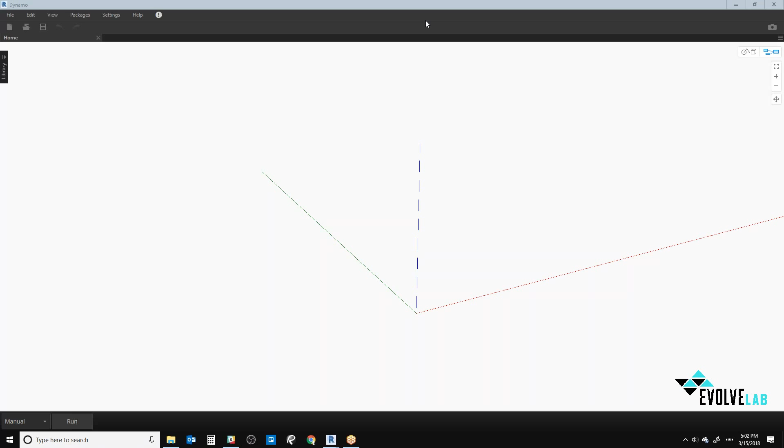So to start off, the idea I'm going with—if you guys saw the agenda for the day—is related to renumbering with a spline and then using this custom package called Firefly. That's kind of the holistic view of what we're doing and why we're doing it. Is there any questions about that, or anything you guys want to comment on?

Sounds good. Good. Cool. All right. So

So to start off with, I'll just draw this spline so that we can start to get an idea of what this is going to entail. Can you guys see my Revit? Yep, cool. So I have all of these parking stalls across here, and I just set all of their mark values to 0 just so that we could renumber them by spline.

So we're just going to say we want all of these things to be numbered. Like this will be 0, and then you'll come all the way across, and this will be number 12 on this end, and then say this will be number 13, and then we'll come across and this will be 21 or something, whatever it's supposed to be.

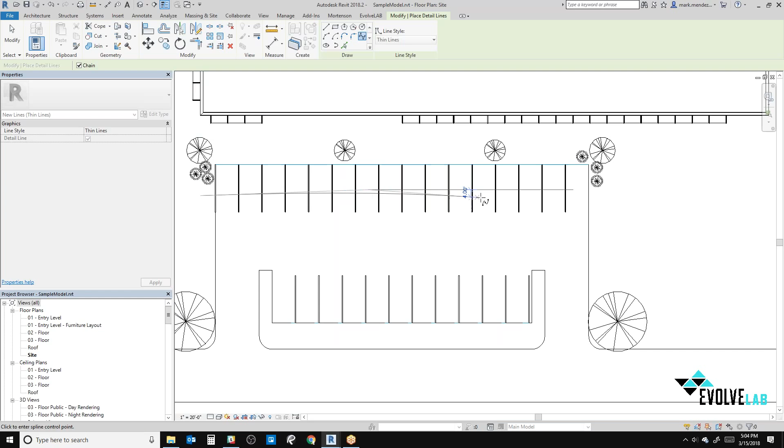So if we want to do something like that - renumbering with spline workflows is pretty common, especially when it comes to using things like sheets and views on sheets. You can renumber those really easily.

You could do things with parking really easily and rooms really easily. Like if you have some sort of correlation between, say, your room and where your room is in the project, and then what the number of the room's going to be, then you can do that pretty easily.

So I hid this roof, so you can imagine, if say there's some room up here in the top right, and if you want that to be, I think this is going to be the second level or something. So if it's like 200 here, then you want it to go in sequential order all the way through here, and this will be like 210 or something like that.

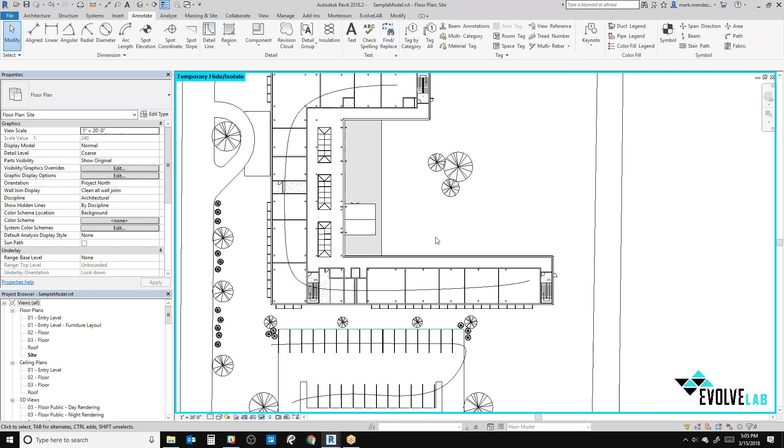And instead of manually doing it, the idea is that you'll be able to just take a spline and do something like this, and then you can analyze that spline using Dynamo and then renumber all of your rooms based on that spline. So you would do something like that, and then you can just run your script and it'll renumber all of your rooms. So I'm just going to do it with parking though, because I was recently working with parking.

And one of our clients had one of these scripts. I didn't see the script, but I thought the idea was cool, and that presenting about it would give a good entry point into introducing how to start working with geometry and Dynamo.

So to start off with, we're going to try to think about where on this spline these parking stalls are located. So this one's very close to the beginning, and this one's very close to the end. And so the idea is, well, how do you measure what's at the end and what's at the beginning?

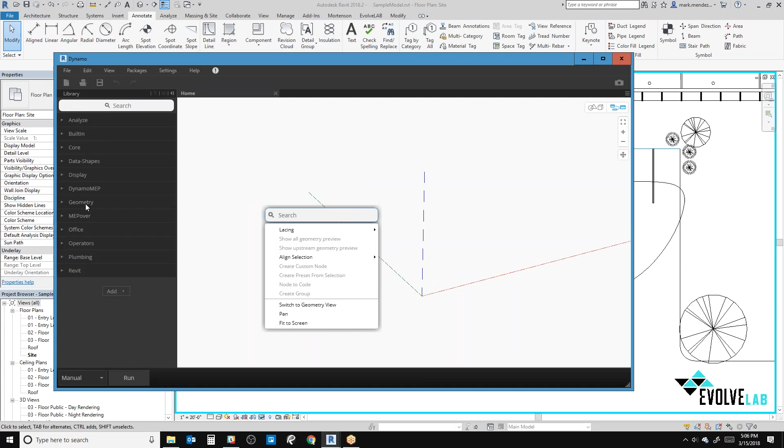And so kind of the idea of this is to use - it's called parametricism, but it's in a different vein than typical parametricism that we see. So if we come into geometry and we start to look at our curve, I'll make a line first just to get it started.

So I could just grab some points and plug these things in and say just make a line that looks just like this, nice and straight across. And so what it's called is parameterizing a curve, something like that.

So if you take the curve, you see right away within curve, and you'll see the same thing within surfaces and within a lot of different primitive geometry shapes, that you have these things called parameters. So it's like normal at parameter or horizontal frame at parameter.

And so if you say something like point at parameter, then if you pass your line into here, what this point at parameter node does is it makes the line into its own coordinate system. So the beginning of the line will be 0, and the end of the line will be 1.

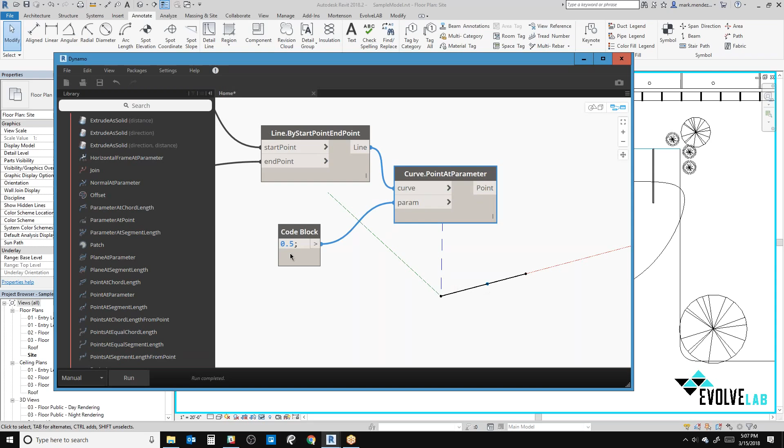So if you go ahead and do something like 0.5, then you can see a little point was populated right there halfway through the line, at 0.5. So you see 0.2, and you change it, then it comes here.

So what I want to show here is - and this is a good leeway into describing this process visually - you can use this package called Firefly.

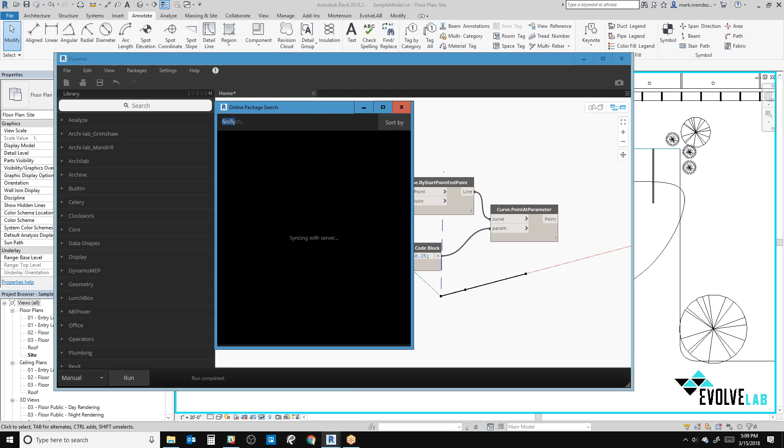As I can. You change your path to your packages frequently, is that what I'm hearing you say? Yeah, I pretty much do it very explicitly so that I can try to get only the custom packages I need, but more often than not, I just try to make it so that I don't have to worry about my custom packages at all.

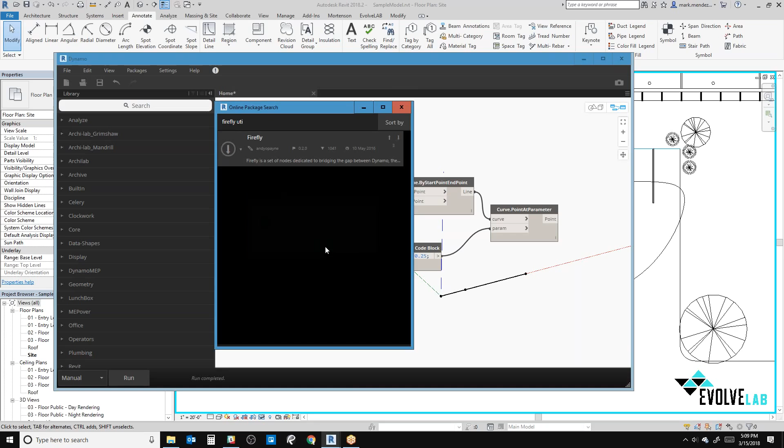Oh wow, okay, I'm not sure where Firefly went. What is going on here? Try hitting backspace once. Oh, here it is. Yeah, so this will go pretty quick. There you go, all right cool. So I got Firefly now.

So Firefly is a custom package. It's typically used with Arduino. It was originally a Grasshopper special package or something like that. The Firefly team has this whole Grasshopper to Arduino framework and infrastructure setup, and they went ahead and ported some of their stuff over to Dynamo.

I don't use the Arduino stuff very much, I did a lot of Arduino stuff in college. Essentially what we can see here is when we drop this node on the canvas, we're going to get the periodic option. It's pretty cool - if you look at the Dynamo code base, you can see that you can tag certain nodes and say periodic enabled essentially. So whenever you drop a certain node on the canvas that allows for periodic, it'll enable itself and realize there's a periodic node you can use.

So I'll just say go from 0 to 1, and this thing kind of works this way. If you have something like this, it's going to continuously run across, and you'll put in your numbers like this. So to kind of unpack this a bit, let me back up one step to make sure everybody's on the same page.

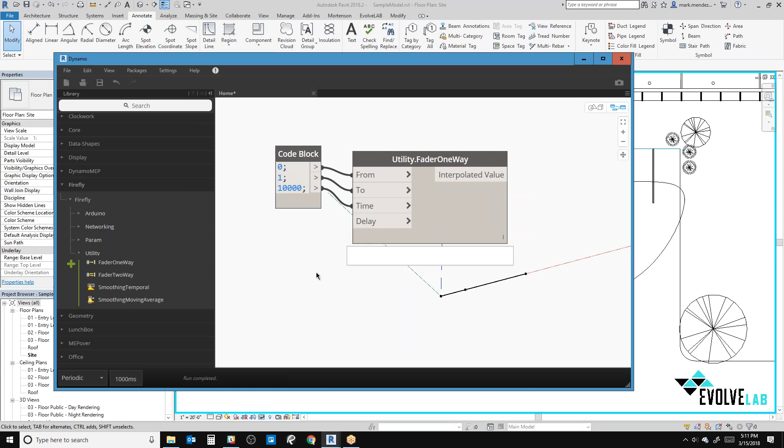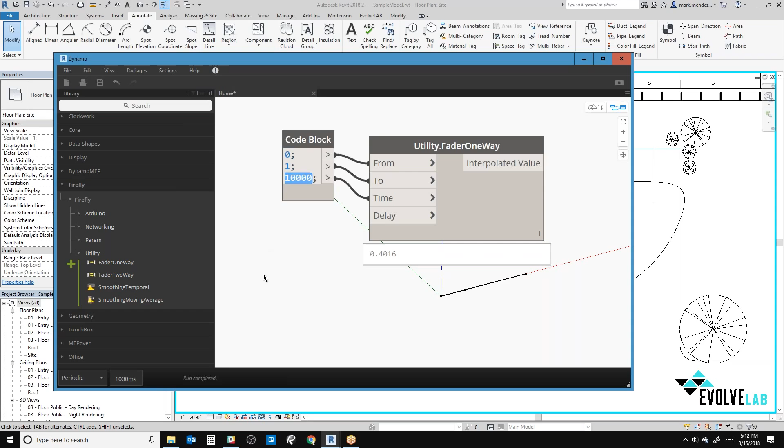Right now what I'm doing is I'm trying to run an animation that'll show how the parametricism of a curve works, so you can start to see what it means to define the start of a curve and the end of a curve, and how to access the points along the curve. You can see this number is climbing by 0.1, and that 0.1 just comes from this - it's telling Dynamo to rerun this event every second, or 1000 milliseconds, and then this one's telling it to chop it up 10 times. So it's going to be skipping on 0.1, and you can take that number and plug it in over here instead.

Well, yeah, let me just cancel that real quick.

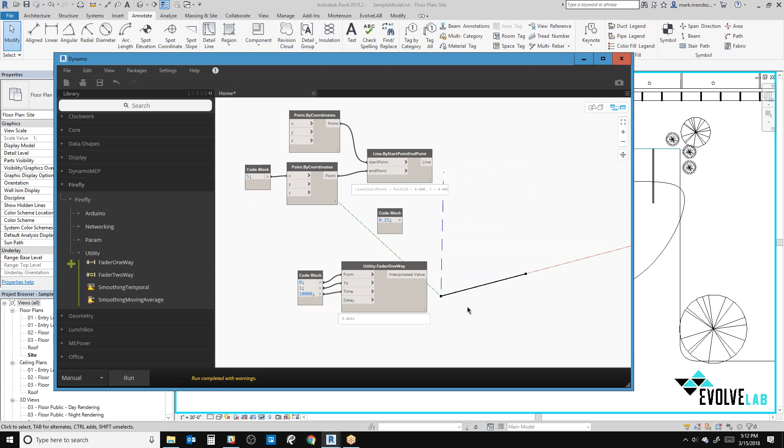I think my point at parameter... node's just a second. Well, what a bummer. Okay, I'll come back to Firefly in a second.

I might have to drop it on the canvas first, actually. So I could show it with like a helix really quick, just to demonstrate something.

If we go ahead and use curve point at parameter, we're pulling all of the points here. If we watch down in the geometry preview, we can see this node, this point, climbing up this helix. We can make it into a sphere to show it a bit better.

And make it like a pretty small radius.

So in one way, this is how you could start getting into doing animations and different things in Dynamo. You can start animating rotations, folding things, and stuff like that. You can also start animating things like creating perspective views. You can draw a spline and then run along that path while making perspective views and taking screenshots, so you can start making GIFs of walking through certain parts of your building really easily.

Some clients like it, so I figured maybe if I showed this to you guys, you could carry it away somewhere or do something with it. Does anyone have any questions about this?

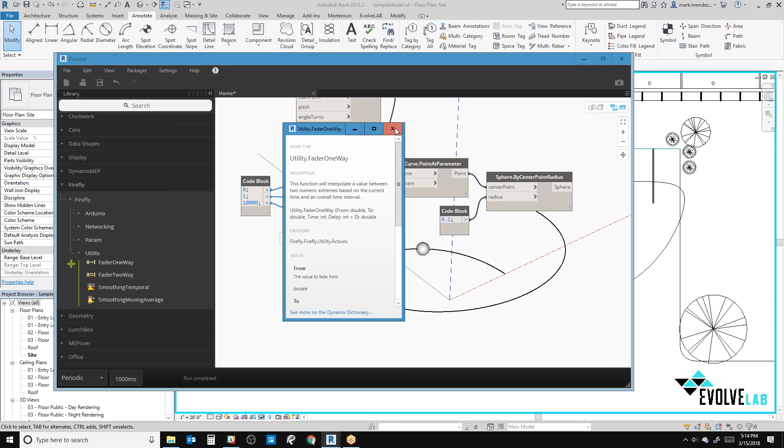Why is that called fader? I'm trying to figure out - I mean it's not important, but I'm just wondering what that name means. I think it's just like fading from, fading to. Yeah, okay, it's not important, but good question, I like it. It's fine.

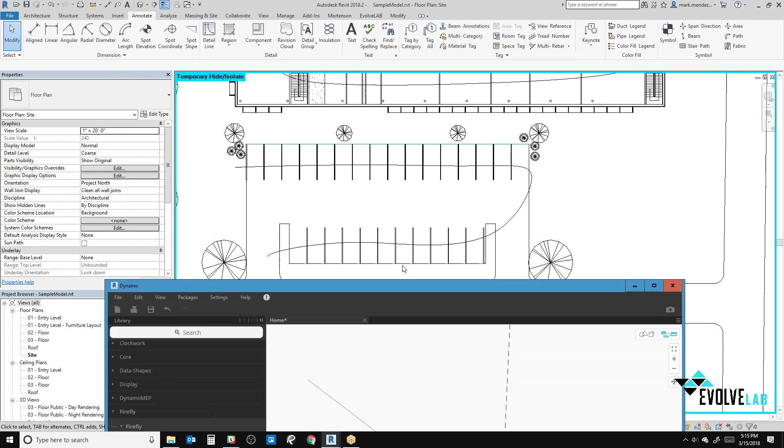So coming back to our original idea of trying to renumber all of these parking stalls with this spline, first off we'll just grab the spline.

We could just use this Select Model Element node. We'll click on the spline, and we can see it come in here - there's our detail curve.

What we want from it is, essentially, we'll also grab all of the parking stalls. Here in Revit selection, we can do All Elements of Category, which I imagine most people are familiar with, and grab all of the parking.

From that, we get all of these parking stalls. We can click on this element ID and it will zoom into one of these parking stalls, confirming that's what it's doing.

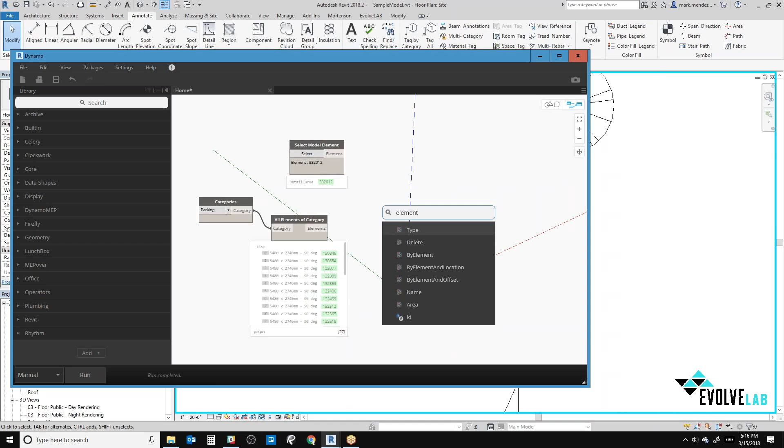Then past that, we can get the curve from the detail curve. The detail curve is just an element in and of itself that has information related to things like line styles, and whether it's symbolic or a model line or a detail line - you can start to get into that when you're using stuff coming out of families.

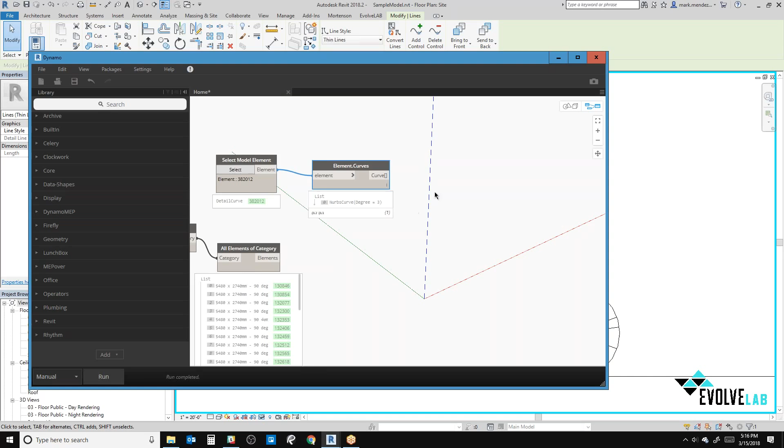Once we do our curves, we can see our parking curve came in right here. We could do something like pulling element geometry from all the parking elements - this might run for a second - but then we can see that this is indeed that spline chopping through all of these parking stalls.

So if we want to get where these parking stalls are along this spline, first we'll want to get the location of all the parking stalls. This Get Location node is pretty good.

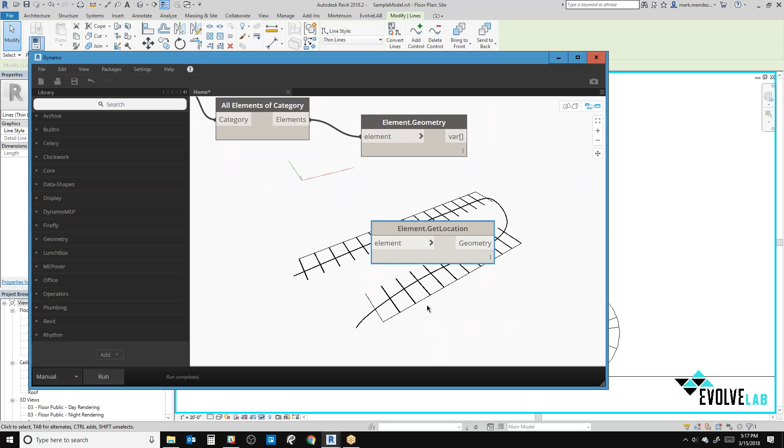It tends to have a weird interaction with structural stuff. If you're working with structural framing or columns, sometimes you have to get those lines in different ways, like going with element geometry or element curves for a structural frame or beam. You won't necessarily always get back a location from that kind of stuff, but maybe that's helpful for anyone working on that.

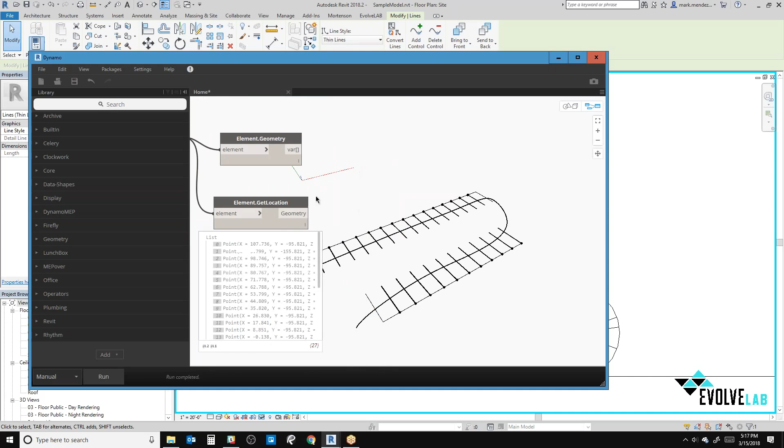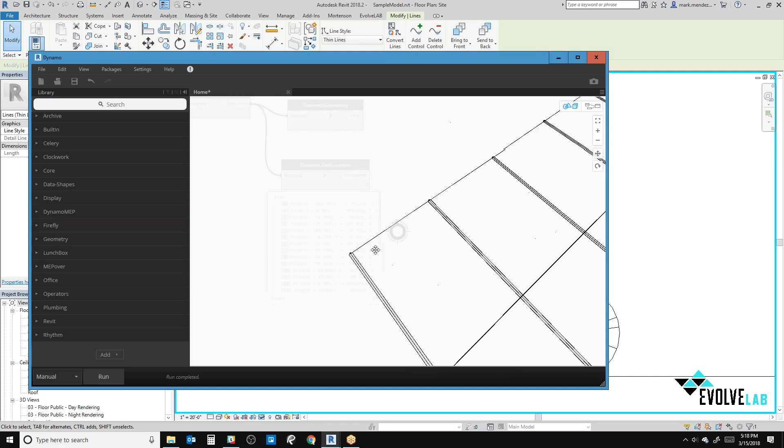So I'll go ahead and hide the parking stalls, and we can see the location of all those parking stalls as they're laid out. It looks like the Get Location node gives us back the point of wherever the placement point of the family instance is - wherever it was built. It looks like we get maybe the bottom right corner of every one of the stalls.

So if we want to get its location relative to the spline, we have another nice node called Closest Point To. We can pass in our curve, and then pass in our points. If we run this, we'll only get back one point.

So we have to make sure we do lacing longest, and I'm not sure I necessarily want to dig into lacing too much. I bet Paul did a really good job explaining it at his BIM workshop at AU this past year.

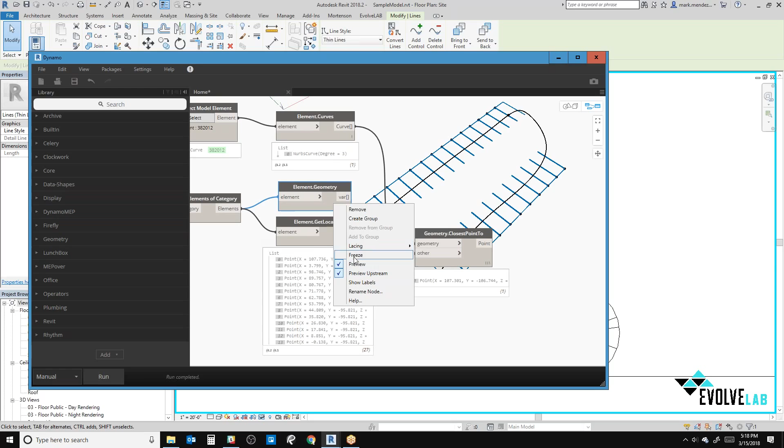So is that true, Paul? Did you go over lacing? I did go over lacing. Not everybody here was there, but yeah, we went over that. I think everybody in the room probably has some concept of lacing, so it's fine to do that shorthand if you like.

Cool, yeah. So we'll go ahead and do longest lacing, and then we see we get all these extra points.

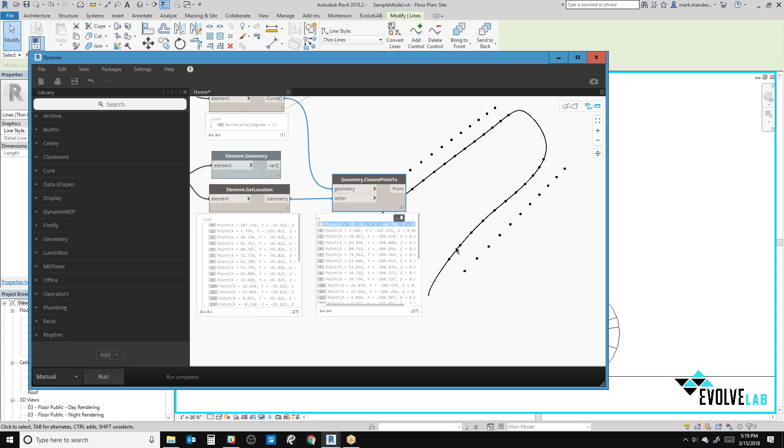Let me zoom into this corner, because this is where everything's going to happen. All of these parking stalls came in kind of randomly, however it was pulled from the element search. It looks like they're all sorted by ID or something like that, so that's not necessarily helpful for us.

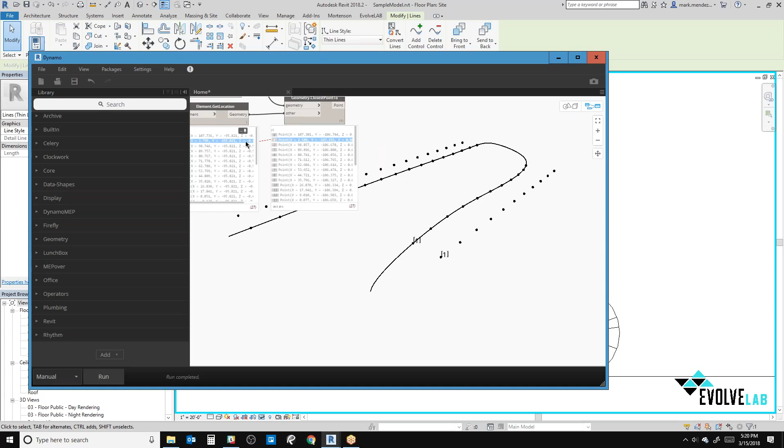The first point here is just this parking stall. You can see everyone is kind of right across from each other as it's all laid out using this Closest Point To. This is the next point in the Closest Point To, and that's the next point - they're all related like this, because it's the closest point to where the parking stall is located, reflected onto that curve.

So we get all of those closest points, and at this point we can just hide the geometry preview of the parking stall locations, and we'll be fine with that. Now that we've got these closest points, we have all the points along this curve.

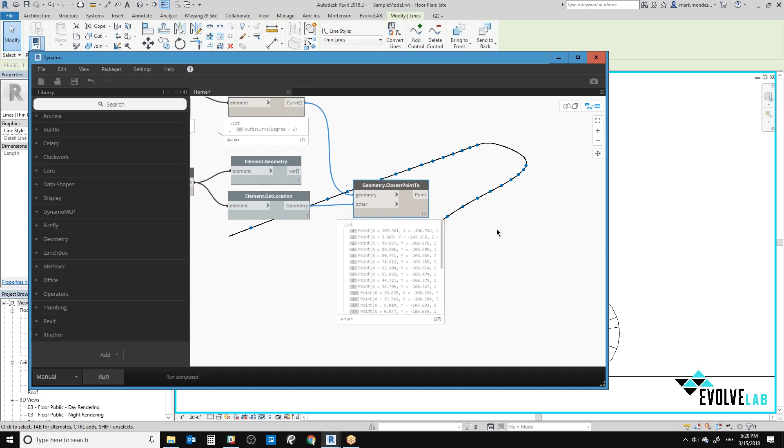This is kind of the opposite of what we saw earlier, because earlier we were looking more for a point at a parameter. We could give it a value of say a quarter, and it says a quarter of the way along this line - tell me what point that is in space, in the world coordinate system, in all of Dynamo, in your project.

So now instead we're looking at what's the parameter at this point. If we say Parameter At Point, there's always a surface and a curve representation of these - we'll check out the surface one in a bit - but we could get the point, pass our curve back here, and we'll get all these parameter values with longest lacing.

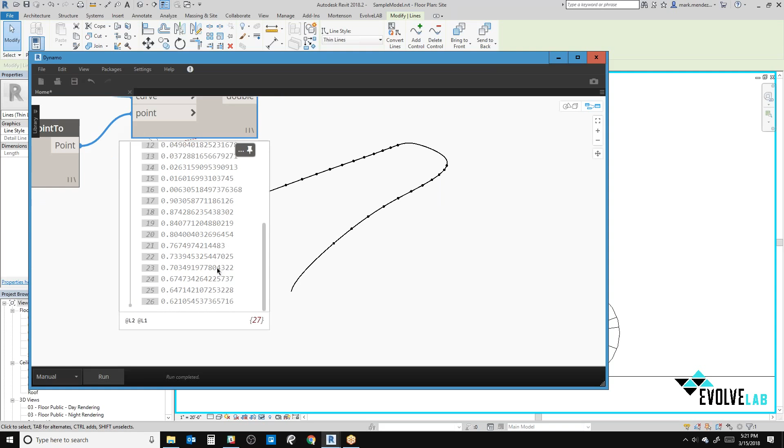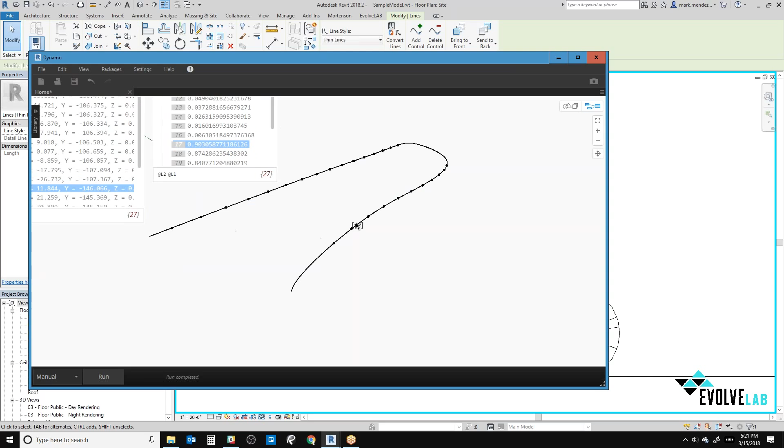Just to unpack what all these decimal points mean, it's essentially how far along this curve it is. If we go with something really small, like number 16, that's going to be right at the very beginning because it's very close to 0. And number 17 is going to be a lot farther along, at 0.9, closer to 1. So we know this is kind of what we have to sort by.

And there's two really awesome nodes that are super important.

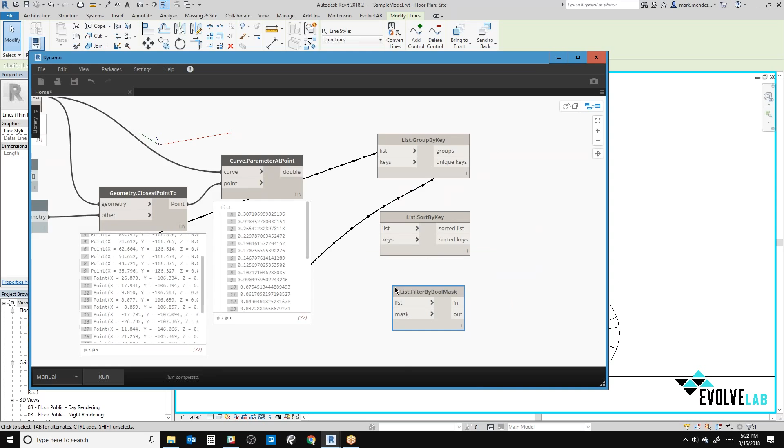I use sort by key and group by key all the time, and they're pretty similar to a filter by bool mask, where you hand it all of these values, and then all of the values correlate to elements in another list. It kind of sorts the first list and then sorts the second list in the same order as it sorted the first one.

Just to do it explicitly, we'll say our keys are going to be all of these values from 0 to 1. And then for the list, we'll say these are going to be our parking, because then it's going to sort out this list. So it's going to sort from 0 to 1, ascending, and however it sorts out these 27 elements, it's going to do the same thing with these 27 elements, switching them all in the same order.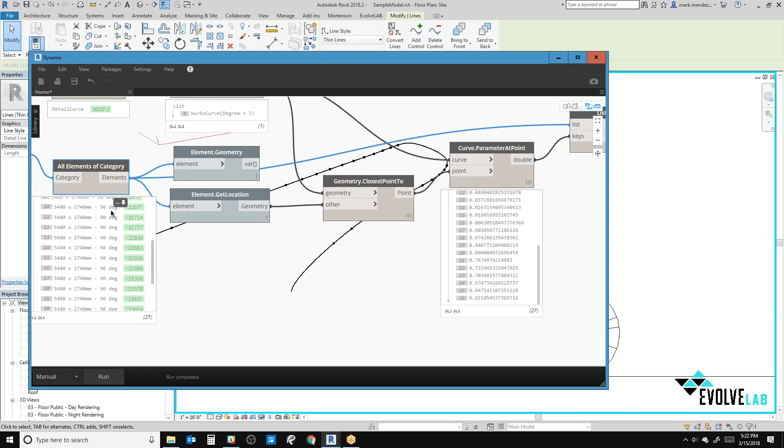So when we run that, we'll get all of our sorted keys on the bottom - that'll be a second output. You can see it's from 0 to 1 in this ascending order. And then on top, we have all of the parking arranged in that same way.

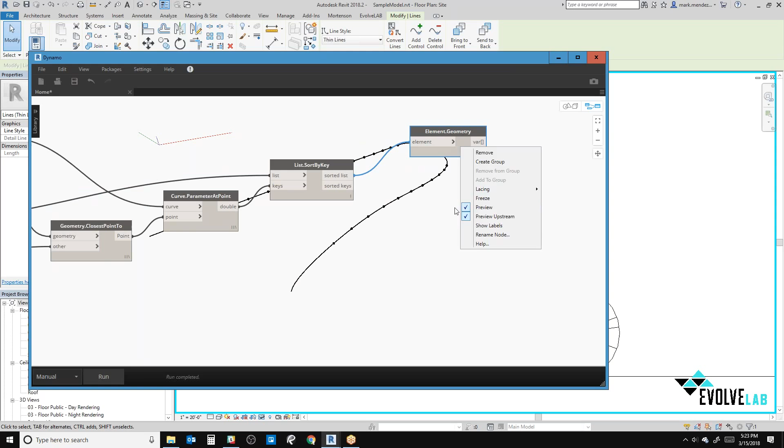So if I grab this element geometry node again, we can see the way that all of the parking laid itself out. If I pull this off to the side, we can see the first element of the list is now the first parking spot, and the second element of the list is the second parking spot. Now everything is sorted based on the parameters of the spline that we drew.

Is there any questions about that? Nope. All right, nice.

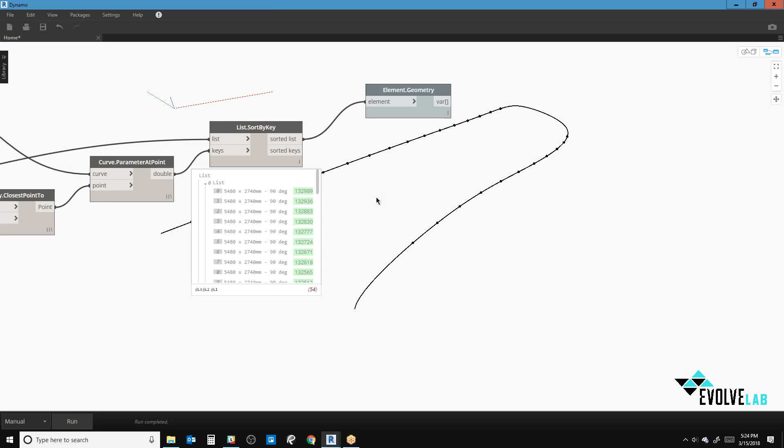At this point, we can do it a couple different ways to figure out the numbers for these parking stalls and then apply them to the values. A cool way I found is if you do get keys - I don't know if you guys have seen this node either. If you just do it on a regular list, it gives you back the indices of the list, so it'll give you back 0 through 26, which is the same as these indices.

They also have a get values node that gives you back the actual values of the list. So this will give you your families, and you could use that to make a dictionary or otherwise organize your data more explicitly now that you've got access to all their positions within the original list.

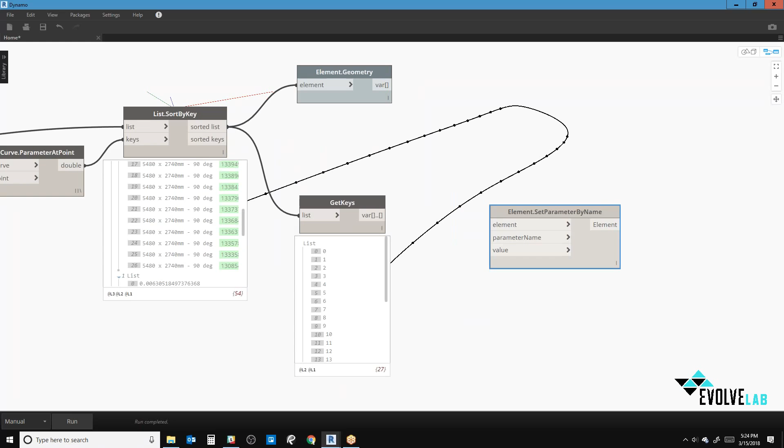So when you get all of these keys, now you have all of the values essentially that you need. You can do something pretty easy like get parameter value by name and set parameter value by name, and just pass this in. I made a parking tag based on the out-of-the-box tag, based on the mark. So I'm going to push this into the mark value and pass the parking stalls in there, and see where it goes.

This says that the parameter storage type is not a number, so mark is like a text parameter. So if I say get parameter by name - oh, actually it's just parameter by name.

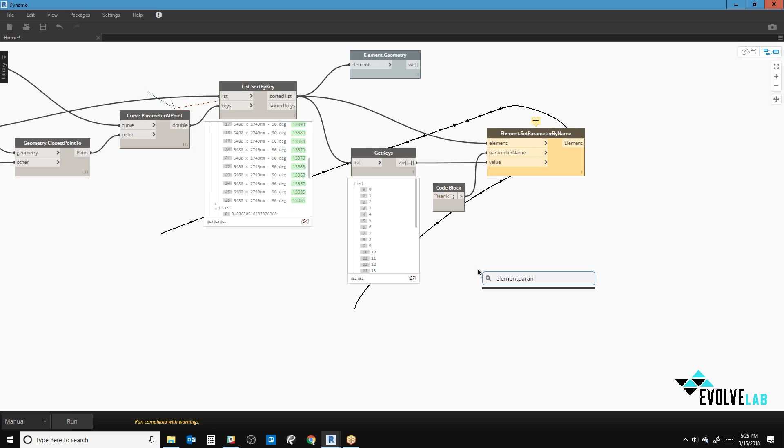This is something I always show people - one really powerful aspect of working in here is that there's an element.parameters node. So if you have Revit Lookup or something like that, you can use that. If I select this parking stall and go to my Revit Lookup tool, I can do snoop current selection, and that gives me access to all of the database entries corresponding to this element.

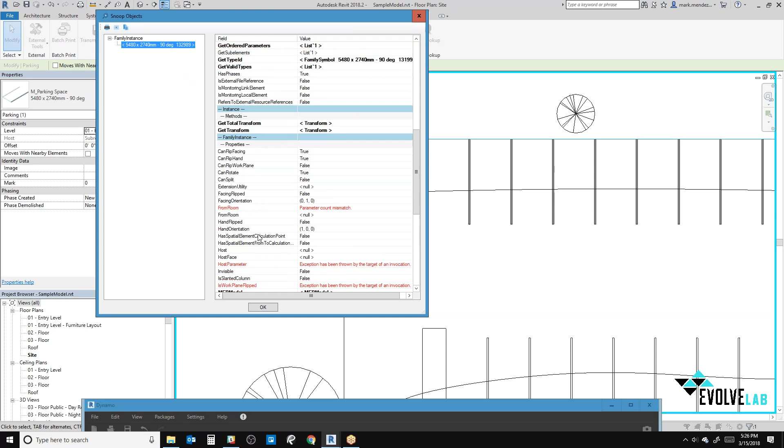So I could get stuff like information about how do I retrieve location, or how do I get the level of this element, or anything that's not going to be readily apparent just looking at it, like especially things like facing orientation. If you want to start automatically placing things like outlets along walls, you're going to have to deal with rotation quite a bit.

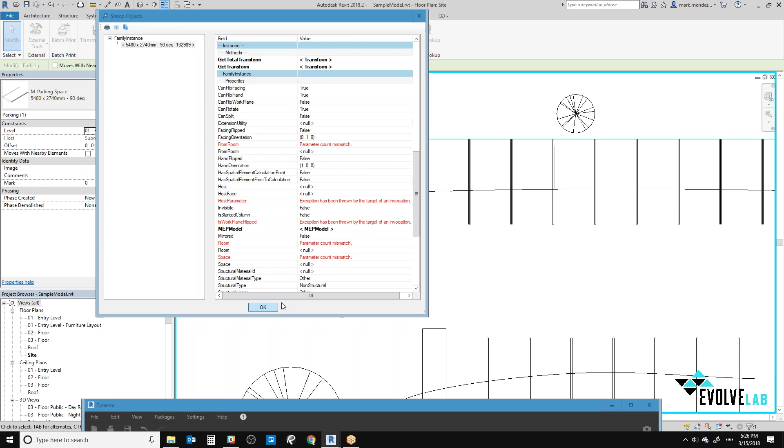Same with when you're panelizing things, or working with curtain panel workflows and trying to see what is the best way to rotate panels into position, looking at stuff like facing orientation isn't really given to you through Dynamo. So you can start to look at the back end of what the database entails.

If you don't have Revit Lookup, you can use the Element.Parameters node, which I passed all of the parking stalls into, and you can see all of the available parameters for your parking stalls. So say for mark, it's right here, it's like number 2.

So if I do Get Item At Index and pull out number 2 at level 2, that will give me all of it. And I can pull out the mark value or the mark parameter. So now I have access to all of these parameter nodes.

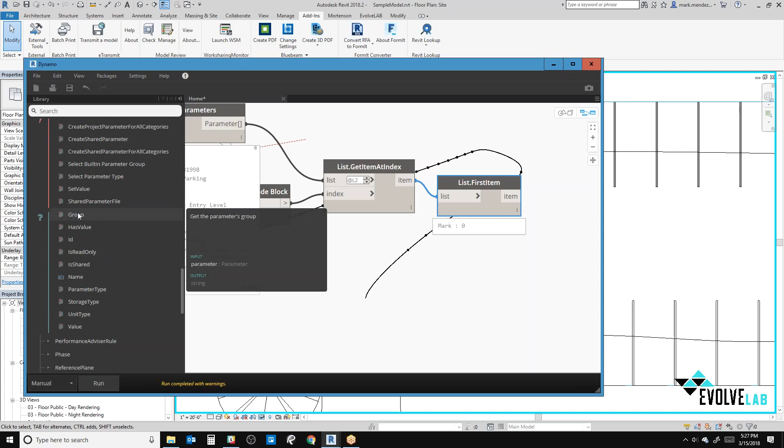Based on that, I could check out what's the parameter's group, or the storage type is what I was going for, because we got a warning earlier that said the parameter storage type is not a number, because we're passing in these numbers here. So if we go and look, you can say oh okay, the parameter storage type is actually a string.

Recently I did quite a bit of work for clients related to making really solid interoperability with Excel workflows, because I think more and more - and I could be wrong - this is the way the industry is going, because when Project Quantum starts to really surface itself, it's going to become something where your data is much more easily editable and accessible. Right now, if you want to edit data in Revit, you kind of have to know Revit in a lot of ways, to navigate to views, to see the proper elements, to click on them and edit values.

Or you have to go to your schedule, and editing tons of values in schedules is really hard, especially for structural firms. They have like 1,000 beams or something, and to edit every single value of the column, there's no select all that's very easy. So you can export everything out to Excel, and then a project manager or whoever can edit all of the information, and then you can import it back in.

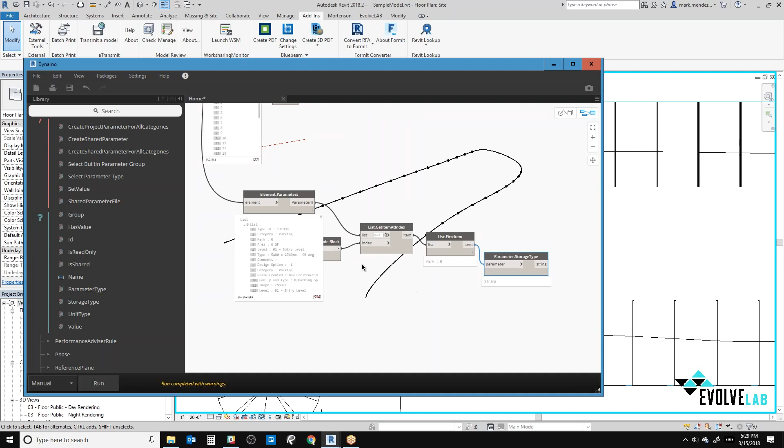So whenever you're working with workflows like that, you got to be really cognizant of parameter storage types. That might help if you're working with some sort of Excel interoperability workflow and getting a lot of errors related to that stuff - this could be a good way to go about it.

So once we know that actually has to be a string, we could just do Object From String or String From Object, and pass that in, and now we'll see that we have the numbers. But if we do Object Type, we can see and just make sure that there are strings being passed out of here, where before it was numbers, well integers I guess in this case.

Once we got all of these strings, we can just pass these in here instead and go ahead and set it. And it runs with no errors, and it looks like everything is there.

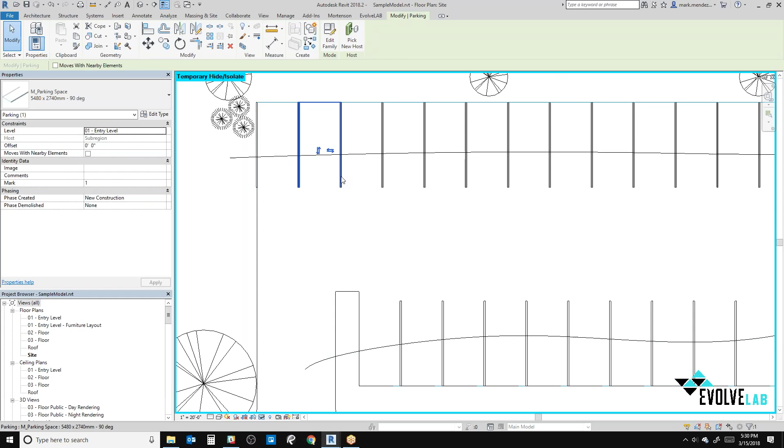So if we go ahead and check it out, this one's mark 0, the mark value is 0, and the mark value is 1 for this one, 2 for that one, 3 for that one, all the way to 26. So in that way, we're able to get everything going and renumber everything by spline.

I'll try to just apply these. Yeah, and we can see that was successful. Are there any questions about that?

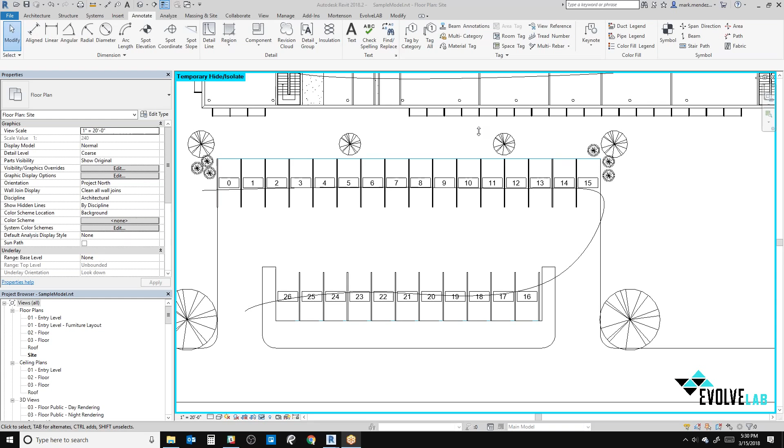So the reality is you would never mark 0 as the first one. How do you start on 1? Nice, good question. You could do things in a complicated way, or you could just use a plus node and say plus 1, and that'll start from 1. You click it, and then you can start from 1. Does that answer your question? Yeah. Nice, let me think.

So the next way I want to go about it is to look at placing these tags automatically, because for something like this where all your parking is at 90-degree angles, it's very easy for Revit. Though when Revit does its tag-not-tagged function, it can be hit or miss, especially for angled parking. I've recently dealt with complicated angled parking with a lot of trig, detail masks showing aisle width, bay width, car door clearance, and stuff like that. Once you get to that level, you're really trying to figure out how to make the parking workflow as easy as possible. Sometimes you can nest the tag within the parking family, but that comes with its own troubles. There's arguments either way for using parking tags versus nesting the tag, or nesting a generic annotation, within the family.

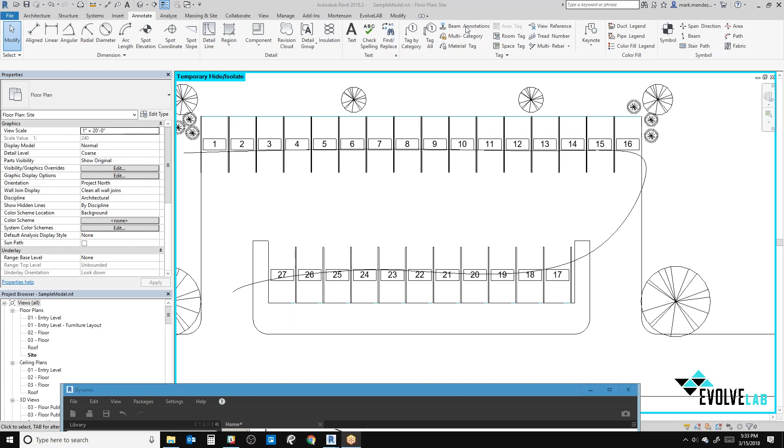Paul, I'd be interested in your comments on that, or anybody else's. Do you guys do your parking a certain way? I don't have a specific example for parking, but I'm not really a fan of nesting a tag into a model—there are too many downsides. Possibly the only common exception is outlets and similar elements, because you want the scale-dependent feature of the generic annotation. But for putting a lot of text in there, it often causes more trouble than it's worth. That's what tags are designed for, though there are always exceptions—there's no hard rule, which is always the first thing I tell people. Yeah, for sure, I 100% agree with that.

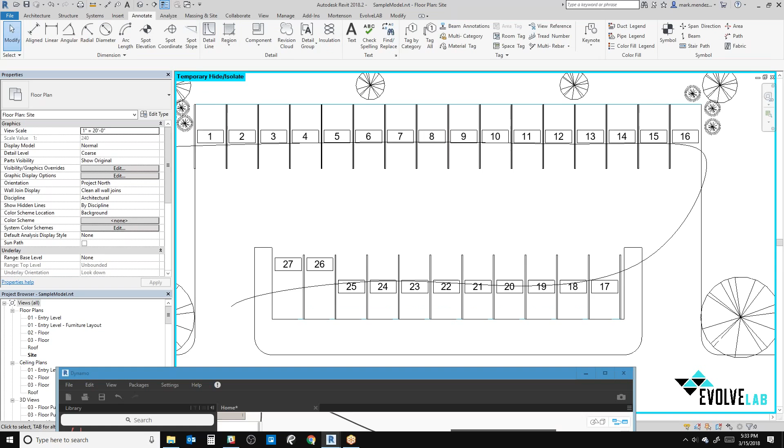So the next thing I want to show you is, if we want to place all our parking tags a little higher automatically, how we'd go about starting that. I think this is also very relevant to automatic placement of room tags and similar things. Different firms have different workflows—some people don't want to automate tagging and just do it themselves, while others like having the tag placed in the room by default. So the goal is to figure out how we're going to start placing tags onto elements across our project using Dynamo and managing that workflow.

I'd also say this is a good opportunity to augment your family to correspond with your Dynamo workflow. If you don't want all the tag information within the family, you could create a little crosshair within your family, then use Dynamo to grab that crosshair and get a specific point to place your tag. It's nice with tags—you can do something like that, and also with detail items and similar things.

But where I've seen it be absolutely killer is with auto-generating section views and 3D views for objects. When you want to create a section view or 3D view for any object, there's a certain minimum of geometric information you need—for example, when creating a section view, you need information about the up direction.

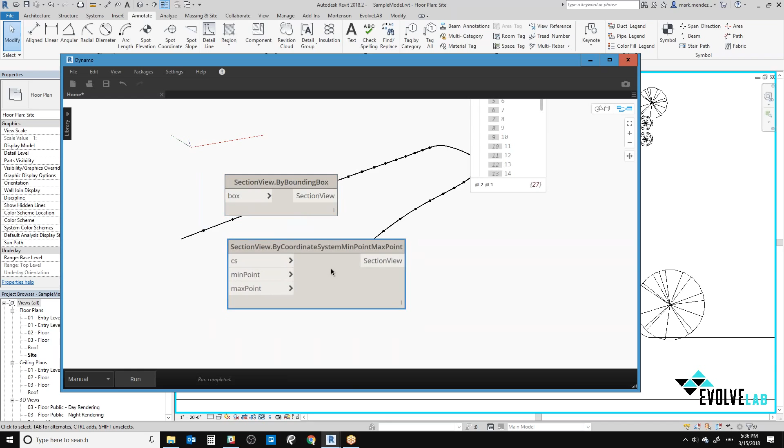If you go to do a section view, Dynamo gives us two tools here: section view by bounding box, and section view by coordinate system min point max point. So it's something where you can get away to a certain extent with using a bounding box, but you almost always have to go with this workflow of using the second node, by coordinate system min point max point. I'll unpack it a little bit because I think it might be helpful.

I won't dig too far into how we're going to do this. When we make our coordinate system, we define the up direction, the right direction, and where the section view is located, and the min/max point judges that far clip offset and things like that. So you can either explicitly set all those things, or implicitly set them with the by bounding box node.

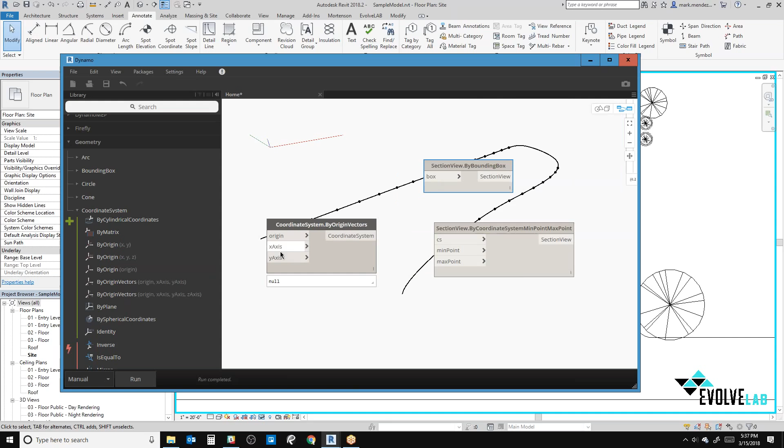But once things start rotating, the bounding box doesn't rotate with it—it stays in its one spot. So you really have to find out all these little pieces of information, which are all related to vectors, vector relationships and things like that, when you come to x coordinate and y coordinate.

So all this to say, augmenting your families for use in Dynamo is really, really powerful. I'd say always, if you're doing a workflow where you're auto-placing stuff, or making geometric assumptions, or you need geometric information about what your script is going to do, always think about adapting the family rather than trying to get all of that information out. For example, with glazing percentages, a lot of people have really good glazing percentage workflows. I'd always push back and say check and see if you could do it out of the box first, like with schedules or something.

But in some cases, it's really easy to just define two parameters that say how much glass is within this family, since they might have family instances for each panelization of a facade, or each structural frame or something like that. It's much easier to just put the information about how much window there is in the family and then read that information out with Dynamo, rather than querying for all the element geometry, looking through it for all the materials assigned to every element, and then filtering out any faces that are looking in the wrong direction.

So you get just the glazing percentage faces that are going to be accounted for, and doing this whole workflow. It's a really powerful tool, and I highly recommend it—if anybody tries something like this where they augment their family, I'd be excited to hear about that.

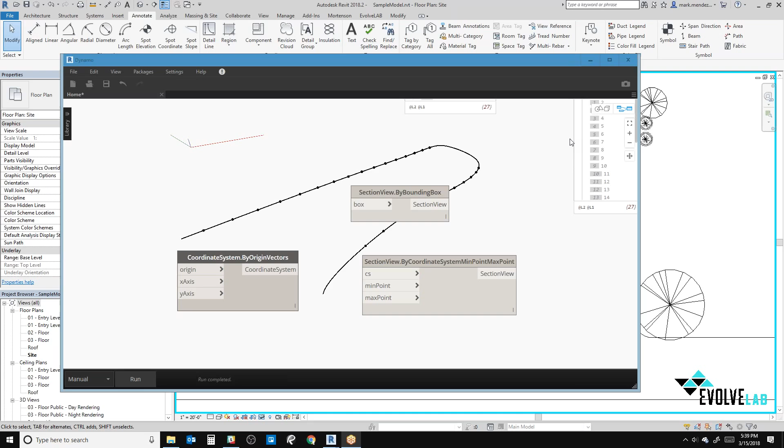So, kind of a tangent, but maybe it's helpful, and I'm sure it will be at some point. The last thing I'm going to show you guys is kind of like tagging all of these things without using tag all, and we'll just kind of see how we start to take a look at all of this stuff and what we do with it.

Now that we have all of our mark parameters set, we can come back, and I guess we don't need our spline anymore. Just run it. Yeah, it looks like all the mark parameters are still good.

So we have a tagging node here in the Revit out-of-the-box stuff, and we could say by element and location, or just by element. We'll go ahead and do element and location, and we'll get an active view. There's good ways to get things like active views, and there's not as good ways, because active view doesn't reset very well.

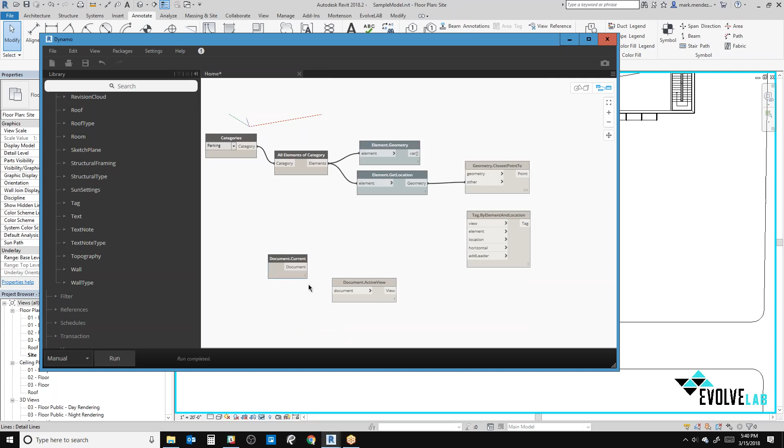Actually, I think it's the current document that doesn't reset very well when you're using Dynamo, like when you're rerunning and stuff. It doesn't reset automatically always, which it might in Dynamo 2.0, but for now it doesn't. So if I just grab this active view, I'll just do it this way for now, and this is just on my site view. So yeah, that's the one we have.

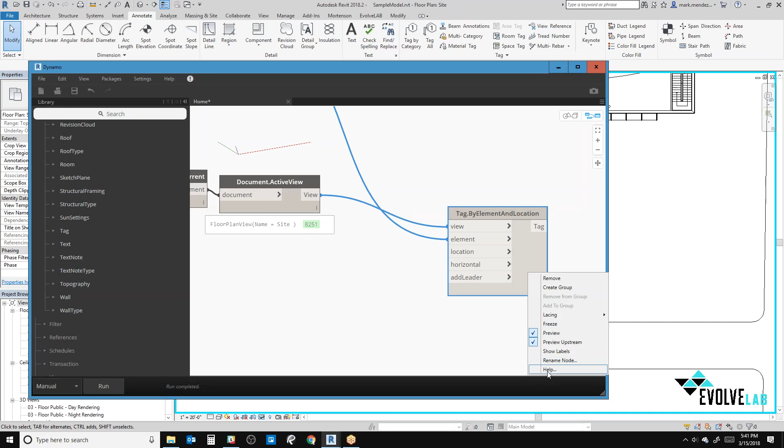So then we want to pass in all of our parking elements, and then we want to pass in locations, and we won't do the leader line. The default value for adding the leader is false, so we don't need to worry about that. And then we'll just need a location.

So this is kind of where we're going to be doing things. We can start off by just passing in the location that we had originally, which we know is just the placement point of the family. Probably not that useful. Let me just delete these tags really quick.

So that we can start fresh. And then if I run this, we'll get all of our tags placed right there in the bottom corner, like as we saw earlier where our get location was at. And so if we want to start to place them more in the middle, more centered and things like that, how would we do that? That's kind of the goal.

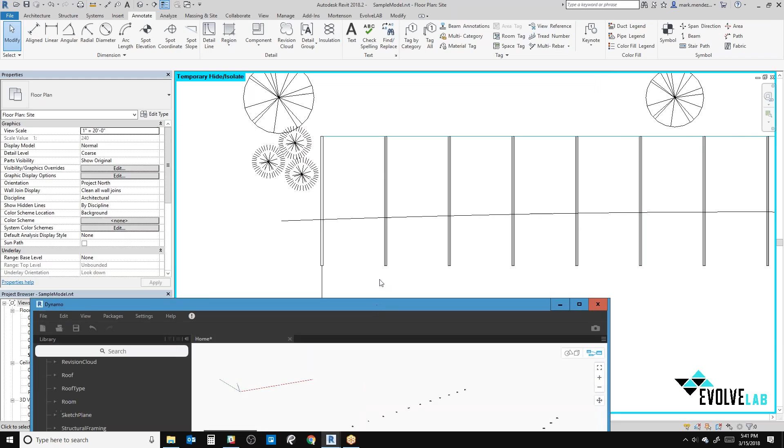So I'm just going to freeze out the tagging node, and I reran it so all of my tags went away. This is a cool trick, and you saw it here first.

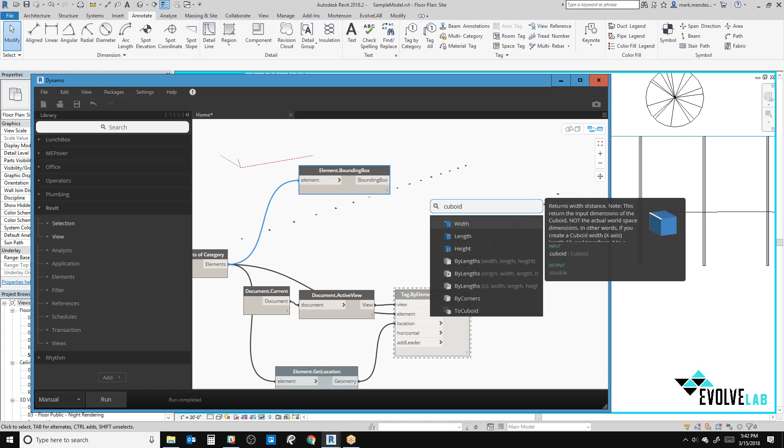So if we do a bounding box around our element - and there's not a whole lot of intuition behind this stuff except kind of just dealing with it before and using it before - then we get a cuboid from a bounding box, which is always a pretty typical workflow when it comes to this stuff, like finding heights and things like that.

Now that we did that, we see that we kind of have all of these set. We have just this small, thin box around each one of our parking stalls, and it's not very tall. I think it's like 0.01, because there's not a whole lot of height to any of these parking stalls.

And what we can do is intersect these with a plane, because what we want is surfaces for each one of these parking stalls. Because if we have surfaces for the parking stalls, then we could use a point-at-parameter node to start to get information about what points are available on each one of these surfaces for us to place things at.

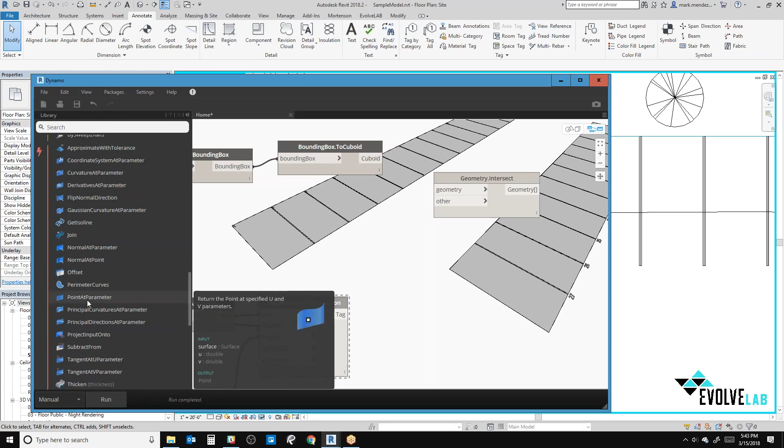So if we look here, we have this point-at-parameter, and it takes in these UV coordinates. You can kind of imagine that if it's like a square, then 0,0 is going to be in one corner of the square, and with the UV values of 1,1, that'll be in the top corner of the square, on the other side.

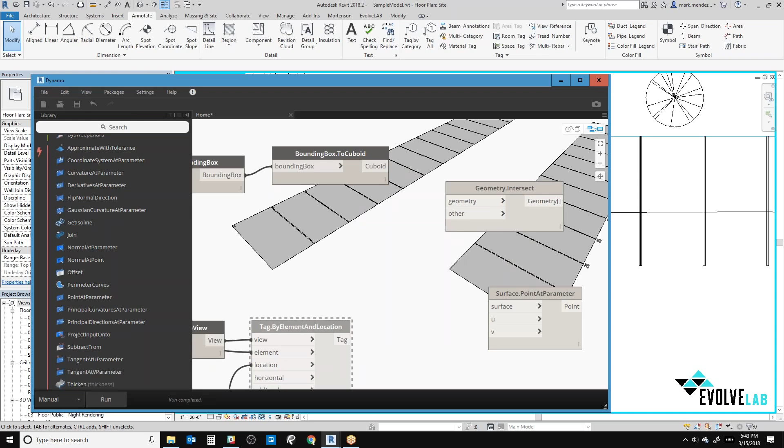But we want surfaces, and right now we just have boxes. So if we try to do a point-at-parameter with a box, it doesn't really make sense. So what we can do is just get a plane and pass this plane in here, and we might have to do a lacing longest or something.

Let's see, where's our plane? Yeah, our plane's right there. So let's see, we could do this location.

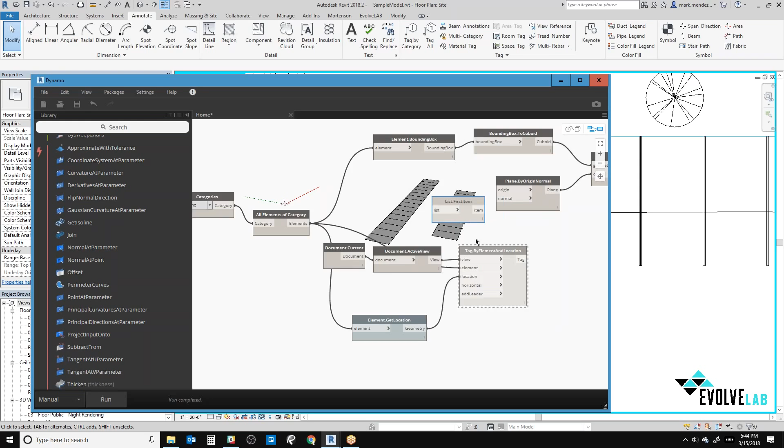We want to make sure that the plane does intersect our stalls. Right now it's only intersecting one of the stalls, maybe using cross-lacing. So if we want it to intersect all of the stalls, we kind of have to fiddle around with it a little bit just to make sure the plane will be passing through everything.

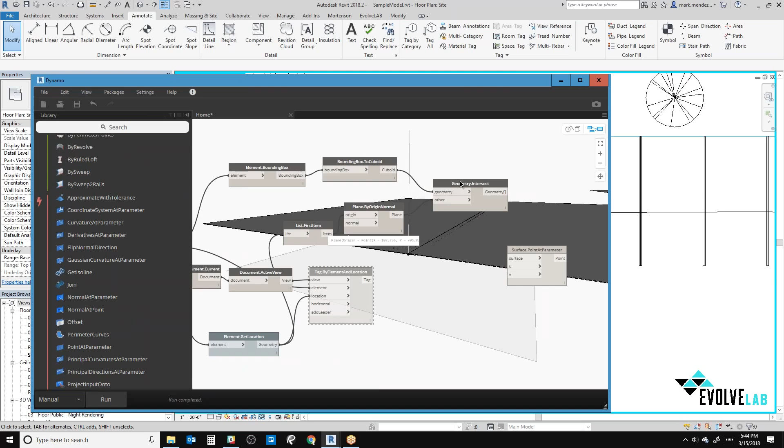So if I come in here, yeah, these are really small boxes. Let's see. I think I'm going to do something different here. I'll just edit this parking family really quick, and then put something in it that'll make this box a little bit bigger.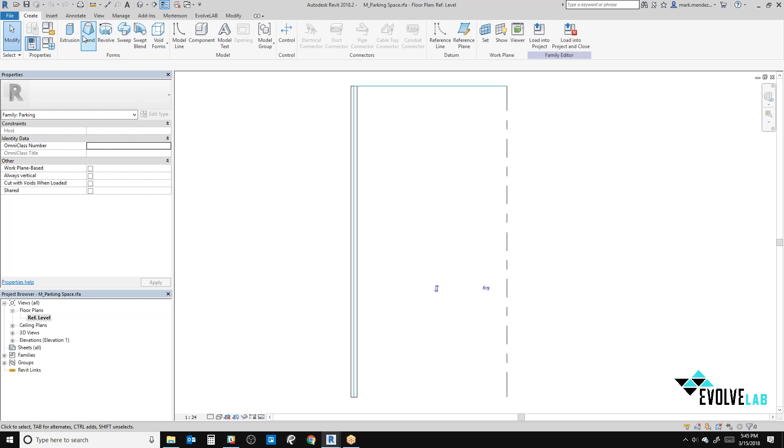So I'll just come in here and make an extrusion, and that'll help us out a bit, so we have a bigger bounding box. Apologies if this is blasphemous for some people, it's just an interesting way of going about it. But yeah, I can go ahead and run that now, and I see all my bounding boxes are a lot higher, and then we can start to get all the geometry for these things.

Okay, well, I'm kind of confused here for a second, but this Z point, I think, is what's throwing it off. Yeah, so I'm just going to make a point that's a little bit higher. I think that's all it is. It's just something where we're looking at, well actually here I'll just get a centroid of one of these cubes.

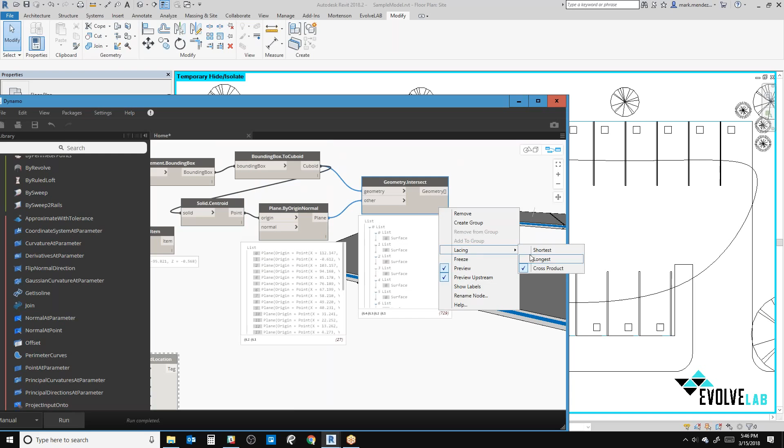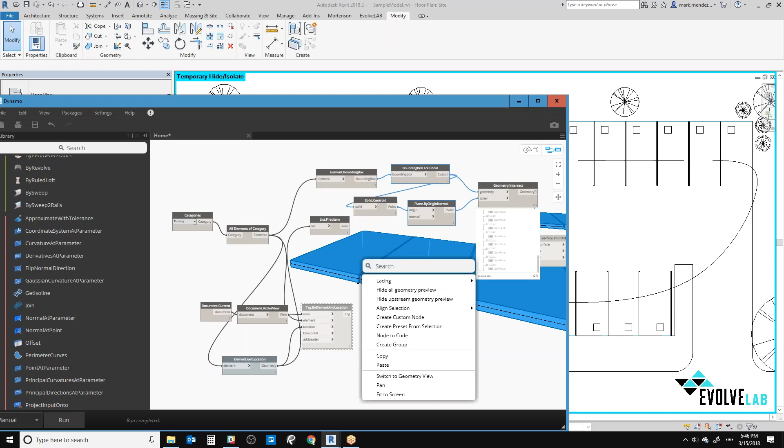And then that could be the origin. Pass that through, probably don't need cross product lacing. Nice, so now we have surfaces at all of these plots. So if we go ahead and hide all of these, now we have just surfaces for each one of these things.

I'll flatten out this list, and we can start to see our interaction between the surfaces and the parameters. So if I get 0.5, 0.5, then that'll give us the center point of this surface. Go ahead and make that one.

Oh, I did not see that coming. Did anyone see that coming? I did not see that coming. Okay, well, I don't know. Hopefully that gives the idea of what we would be trying to do.

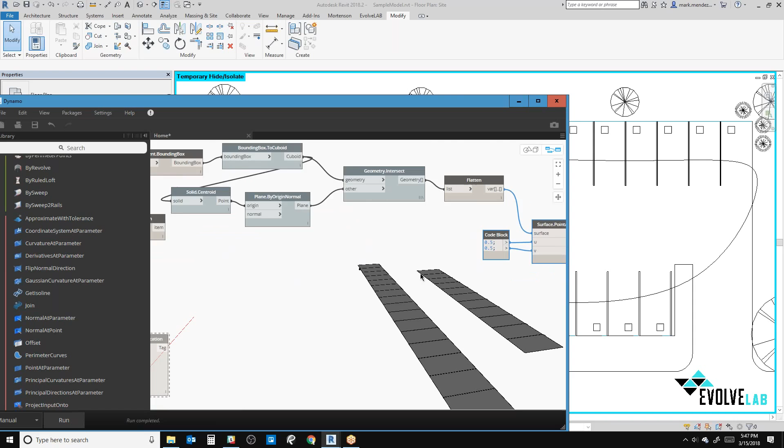I can just take this back a bit and use this centroid point and start to adjust it to draw our tag. So I'll pass the points into these locations, and when we run that, we'll get all of these center points along all of these things.

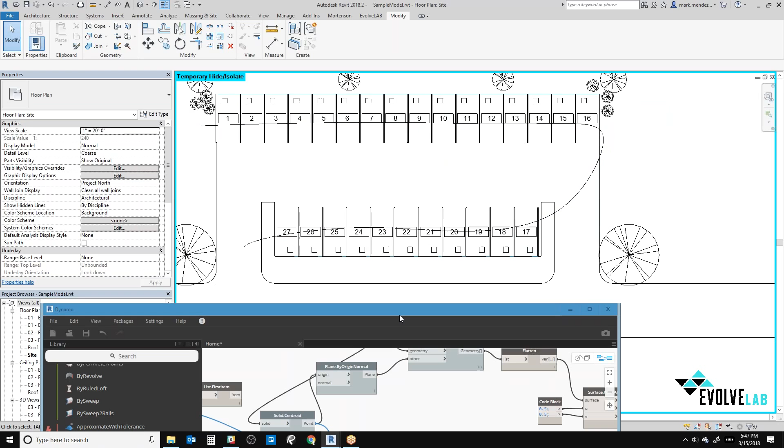I guess I don't really need the square within this parking space anymore for that, but that's okay. And then we could do geometry translate and start to get more locations around the center point of that. So we go like this, and then we can translate it a little bit over to the right, and we could use a number slider for that as well. So we do that, and everything can start to shift. So as I change this value...

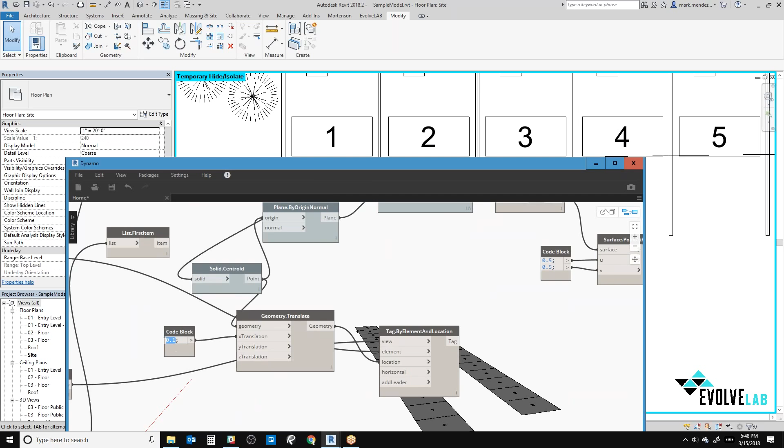F5. So you can use F5 too to rerun your graph, so you don't have to pull it up. So if I go for 1, that'll be a lot more intense. Everything will start to shift over to the right. And if I want to shift everything up, I could do something like that. Or if I want to shift everything down, I could do something like that.

Cool, is there any questions about that? I know that was kind of rocky, it's a weird thing that I experienced, but hopefully that gives an idea of how to start placing things automatically with a bit more explicit sense of what's going on, or data management if you will.

Do you... I sometimes like to put room tags outside the rooms, but lined up with each other, and then pointing, so the leaders are varying lengths depending on where the room is, you know? You understand what I'm describing?

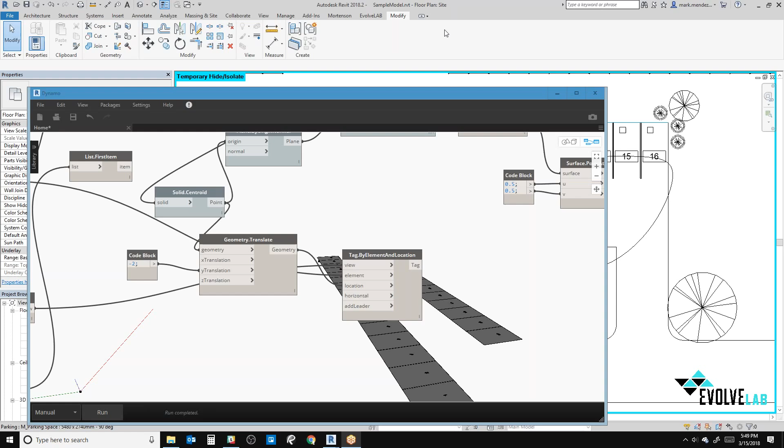Yeah, yeah, so here you're moving the tags relative to some point in the object. I'm wondering if you can move the tags so that they line up with some line that you've drawn instead.

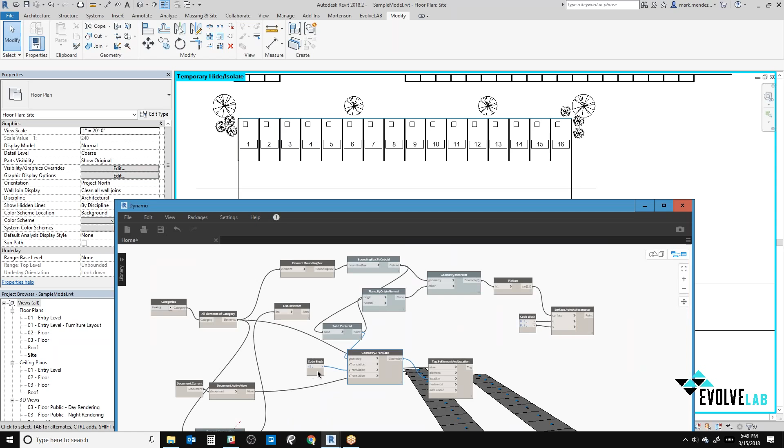Oh yeah, that's a really good one. Okay, I'll just do it. So if I get a detail line and just draw it straight across here... they're all kind of close, but we'll see exactly what happens when we do something like this. It doesn't get polished - proof of concept is all I care about. Good question, so I'll test it out.

It'll be something similar to what we did earlier. So we'll select that line to get its geometry over here into Dynamo, and we'll have to do element curves in order to get the line out of that detail line. I'll run that - okay, now we got our line, and we got our location points, so we could just do another closest-to.

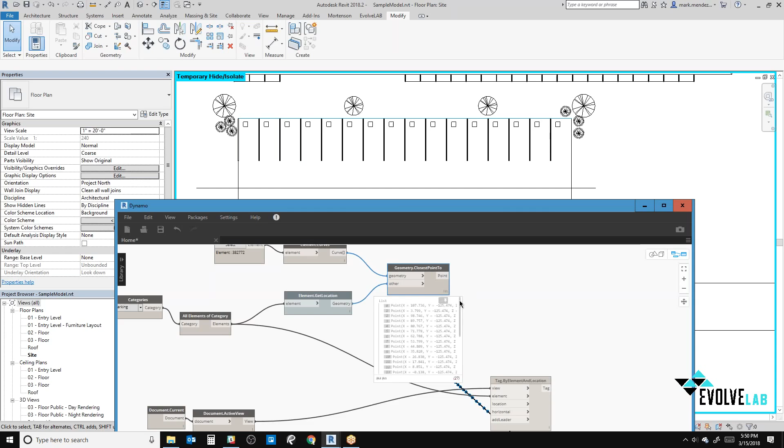We know we have to do a lacing longest here. When we run that, we get all of these points, and the points are along this line. So if we do this for location, and then say add leader true... yeah, okay, there you go. A little tweaking, but yeah, that was pretty cool.

All right, awesome. We could do it like this as well - we could do something like this, and then filter out based on how close things are to one another. So maybe we can have all the tags that are on these parking stalls go this way, and all the tags on these parking stalls go that way. That's kind of cool.

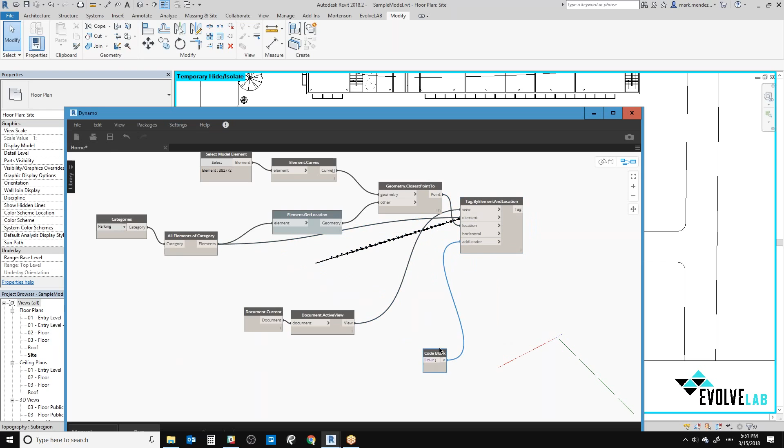Good question. I could forward you that stuff, or I guess it's all recorded so you can just check it out and watch it again. But you've been deleting stuff along the way, so it's not like there's a graph for you to save here - you'd just watch the recording. Yeah, it's just my musings, I suppose. No, it's fine, that's educational too.

Nice. Any other questions, guys? Let's hear it.

With some of these workflows, you have the guide, like the little spline line and things like that - do you typically make a Dynamo workset just to organize these, or is there a best practice you've found for these sort of references?

Yeah, I think it's going to vary depending on how involved the process is. If we do a lot of workflows, like you mentioned spline specifically - for section view creation and things like that, we'll have very explicitly set parameters that tell the graph if something's been processed or not, usually done with project parameters. Then we'll have view filters set up so things could get hidden out, and that would work out really well.

It just depends. If it's something like this, you're going to renumber your parking in one go, and then you could just delete the spline out of there. But if you're augmenting tons of families, or otherwise working with a massive amount of elements in your project and running stuff on them, I think it's very important to have worksets set up that get set and pulled automatically so everything could be corresponding, or have parameters set up that are just yes/no parameters that tell you if things have been documented or not. Abstractly, that's how I'd answer it.